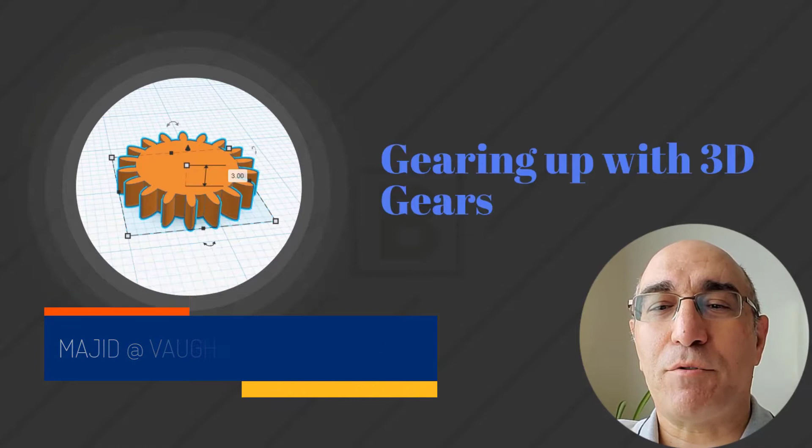Gears are one of the most important parts in almost any mechanical tool. You can find them in mighty machines, fancy watches, or tiny toys. But sometimes they need to be redesigned or replaced. The good news is 3D designing gives us that opportunity.

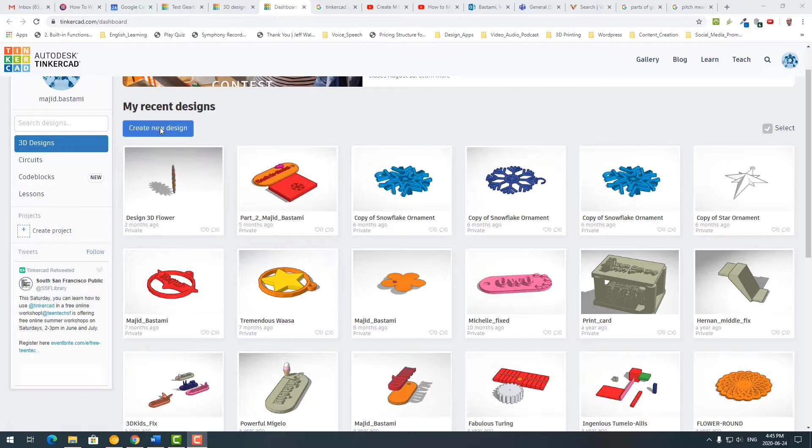So let's gear up. Okay, again, we are on Tinkercad website. I'm going to click on create a new design as usual and change the name of the project to gears.

There are two ways of making a gear: the easy way and the hard way. Today I wanted to focus on the easy way - that's normal, we always search for easy ways - but just mention the hard way briefly. Hard way meaning I start from scratch to make a gear. The easy way means using one of the features on Tinkercad to make a gear very fast.

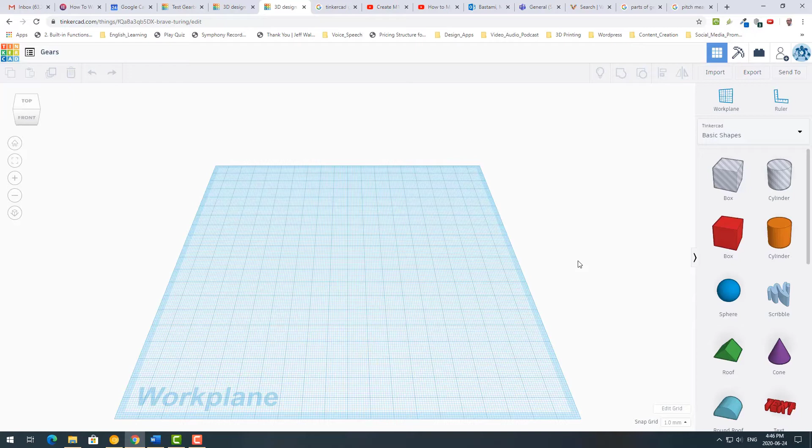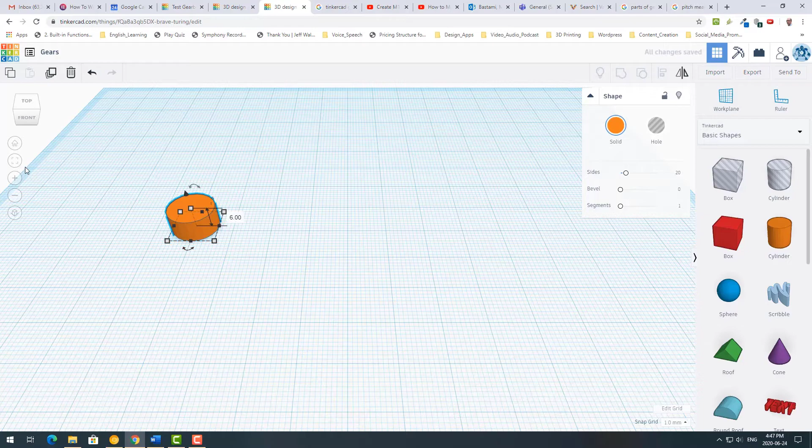So for the hard way, we use a cylinder as usual, drag and drop, resize the cylinder, and let's pick 12, make it bigger, the height is 6 here.

So bring another cylinder, and I wanted to use this as teeth for the cylinder. I'm changing this to 1 millimeter, and this one to 3 or 4. Let's pick 3.

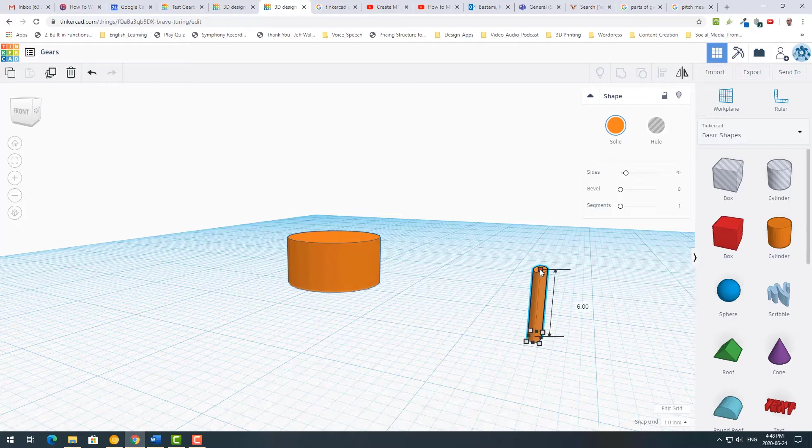Bring it and put it in the middle, just to make sure that it's exactly in the middle. And I wanted to have only 1 millimeter inside.

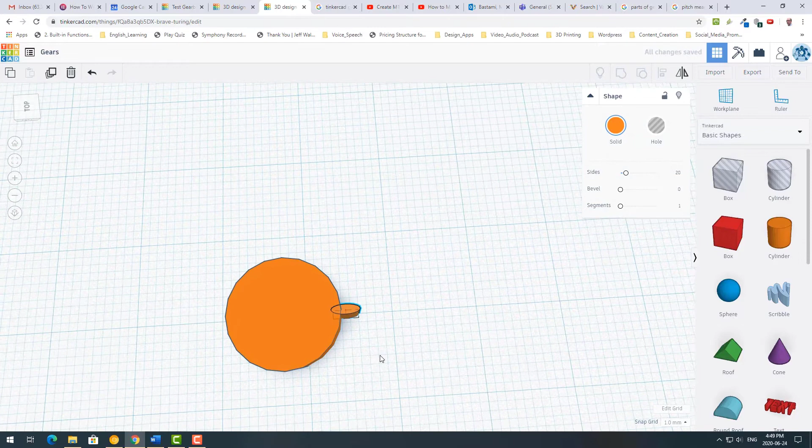So I'm making another one exactly at the same area on the other side. For that one I'm using Ctrl+D to duplicate, just move this. Now they are exactly in the middle of the first cylinder.

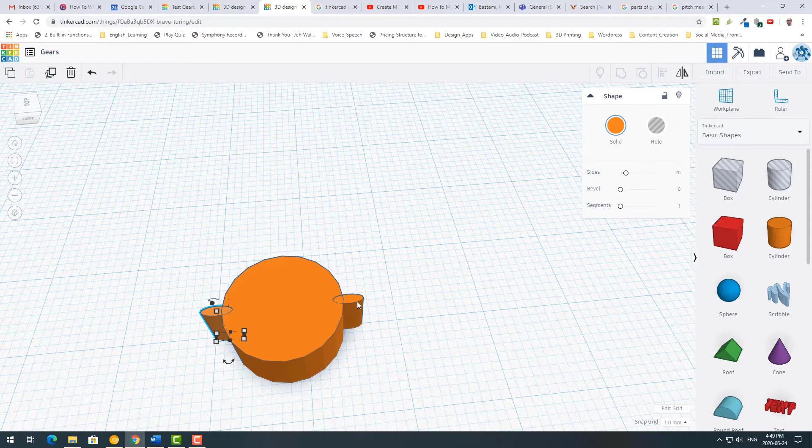So if I pick both, I selected both of them. Now I'm using the same technique I used when I wanted to make a flower - duplicate and rotate a little bit, then duplicate again and again, and Tinkercad follows that pattern. So for this one, now they are both selected.

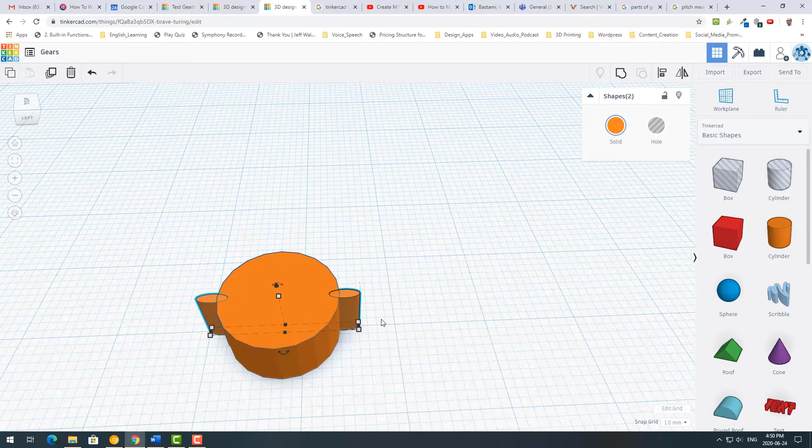So if I just rotate them, I duplicate this one and rotate it 20 degrees, and continue duplicating. Control A to grab all of them and use grouping. So now I have my gear. That was the hard way.

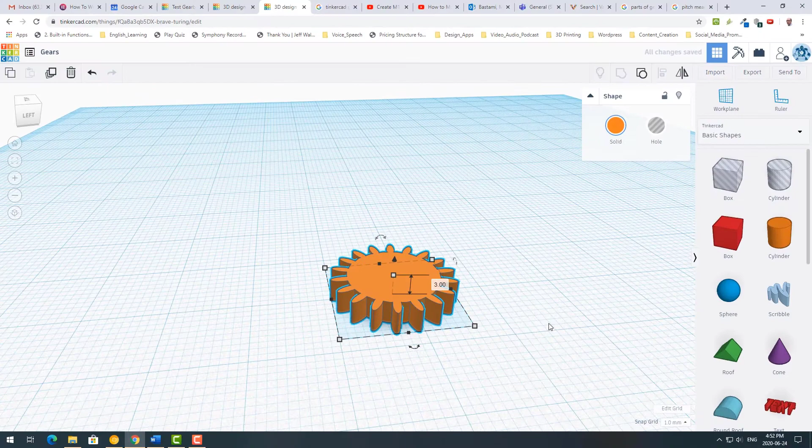You may say that if that was the hard way, what would be the easy way? Okay, I will show you and you can see how easy it is to make a gear with Tinkercad features.

So up to now we usually use the basic shapes on the shape generator on the right side of the Tinkercad work plane. But let's dive into shape generators all. These are different add-ons or extra coding some people in the community added to Tinkercad to make designing much easier for us as an end user.

So if you go to page 3 on that shape generators all, you see there are different gears, or gear generators you can use. This is the simplest one, and these two are the most popular ones because there are so many options you can use - metric and useful gear.

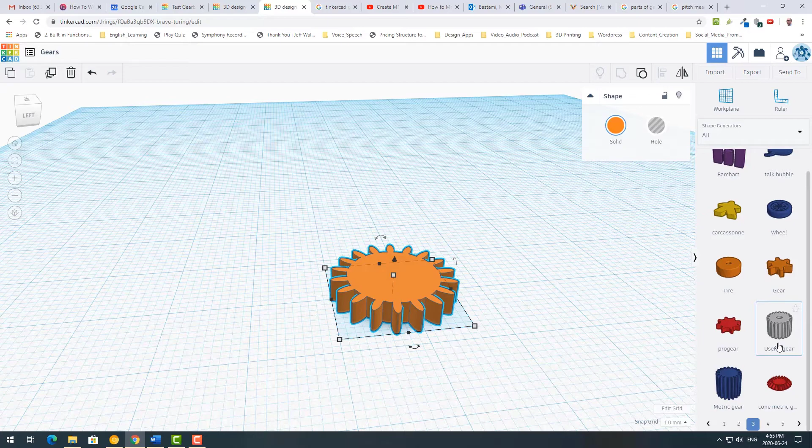Metric is more accurate than useful gear, but useful gear has a hole in the middle, the center of the gear, so you don't need to create a hole as a shaft inside the gear. But let's try this metric gear.

As you see, it comes with different features, so you can play with these features. For example, let's move this part, I'm coming back to this. I can change the module, I can change the number of teeth based on the same module. I can change the pitch angle.

Let's show you when I change it from 20 - look at these angles. I can change the angle and make it sharper or softer. These are things you can change, you can play around based on your needs.

So suppose you have a broken gear on one of the toys or tools and you wanted to print another one. You can see the size of the gear and how many teeth it has, and approximately the angle of the pitch, then play a little bit on these, and that's it. You created the gear without any headaches.

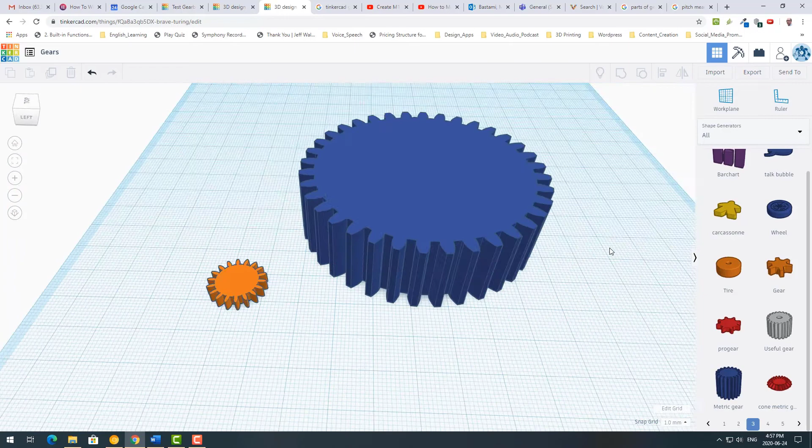The other part is like a regular shape. You can resize it based on what size you want, for example change the height. And you can even add another gear on top of the gear. Suppose I have this gear,

so I can select these two and align them in the middle. I have to change the height of this.

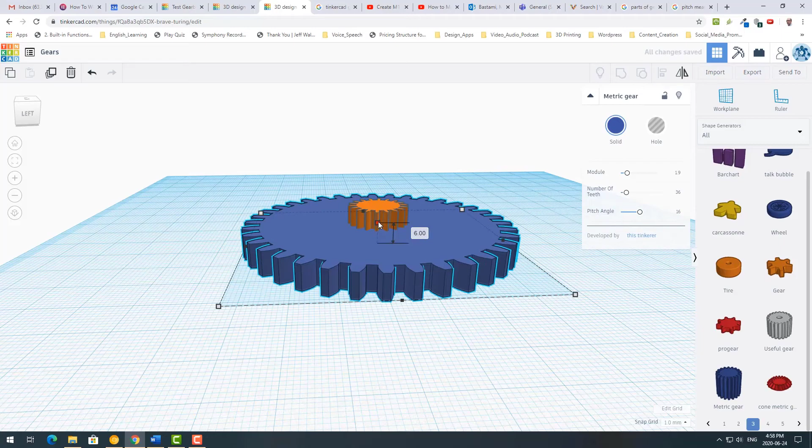So when you have such things, when you have different types of gears attached to each other, I can group them together - just select both and then group them together, then I have one gear.

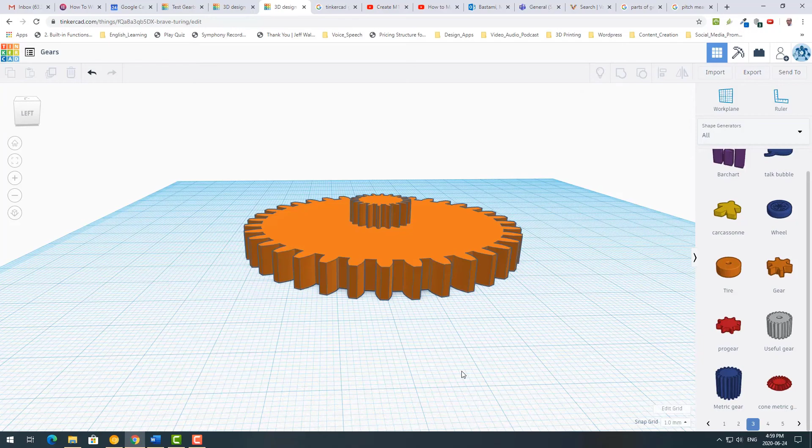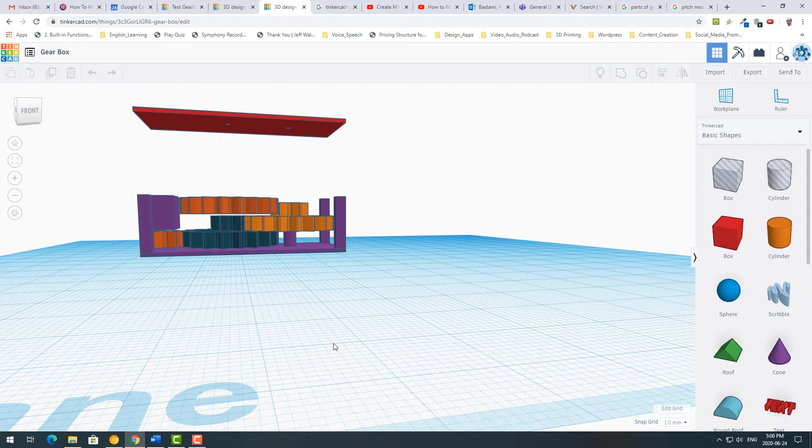So if I come back to my dashboard and go to the previous project, as you see now I have different gears. Some of them are connected - for example, these two are connected and these two are connected too, and this is a gearbox. I can complete this project, add this part on the top, then complete this project and use it for different purposes.